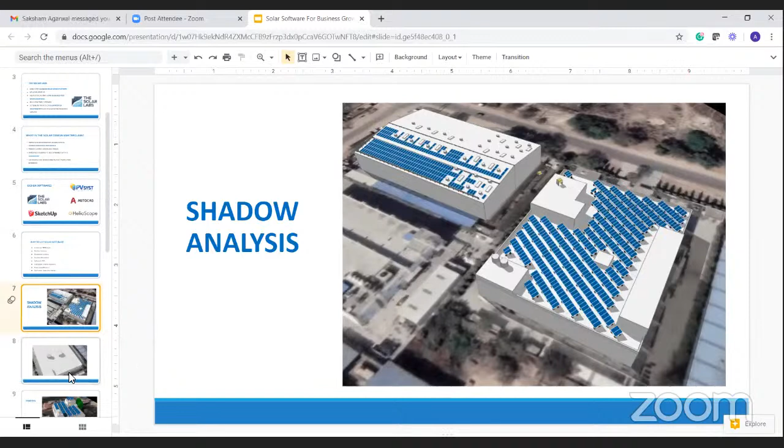To show you some of the features, this is the shadow analysis. I will be showing you all of these features in a live demonstration. The first one is the shadow analysis.

To give more emphasis on the shadow analysis, I want to point out that the cylindrical object's shadow analysis is way different than the shadow generated by a polygon. Here you can see two polygons of the same size, one cylindrical, one square, and you can see what the shadow pattern looks like.

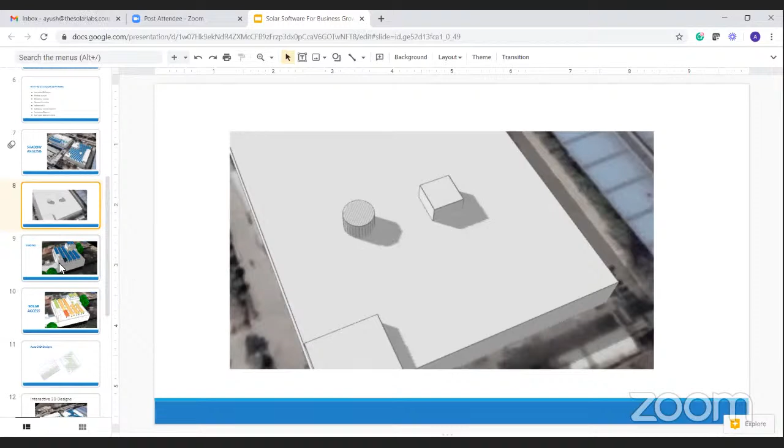This is the shading that we are getting due to these high-rise buildings. All these plans are being generated by me myself, and I am showing you some of the designs that I feel have helped our customers a lot.

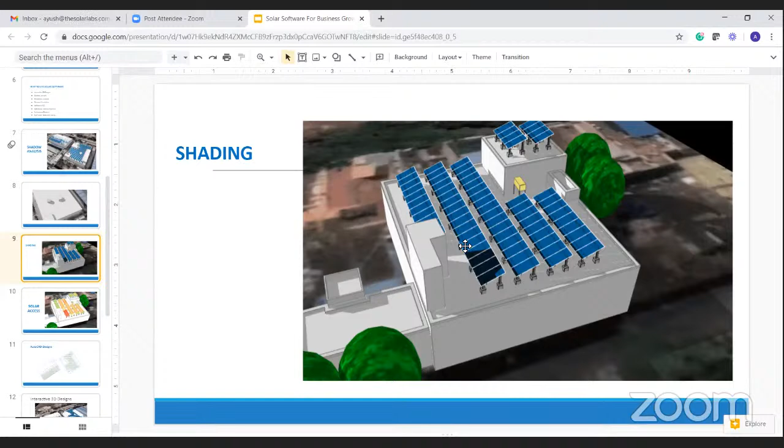For the same thing, we have the solar access map. I will tell you all about these things once we go into the software itself. This is the CAD layout generated by me, 3D designs, and all other things.

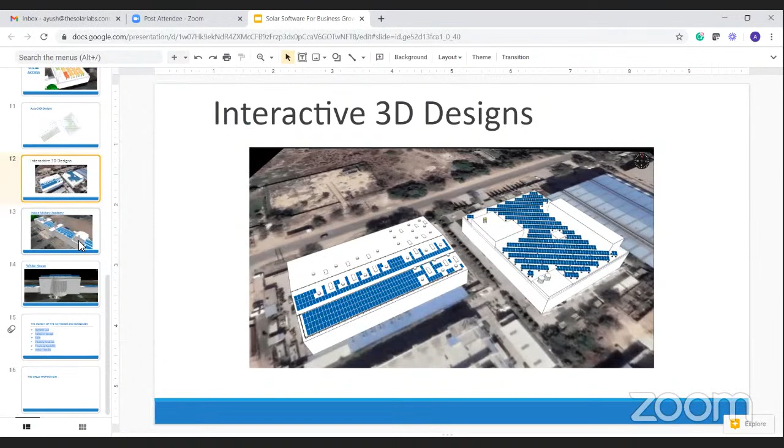So let me take you to the software now. To go to the software, simply go onto Google. Here you can type thesolarlabs.com and hit enter, and boom, we are on the page.

We are on the home page of the Solar Labs. It is a cloud-based software. You don't need to install this software, it doesn't take a bit of your hard disk. It runs only with a decent configured laptop or PC and a good internet connection, and you are all ready to go.

You just have to type your login credentials, like you would in Facebook or Gmail, and then you are ready to design, to show your designs, to make new designs anywhere in the comfort of your home, your office, on site, or to your client at their home or location.

So here we have an interactive map. This is the projects page. On the left hand side we have an interactive map showing all the sites designed by me and my colleagues all over India and around the world. You can reach any location by clicking on the site and going to edit, or by searching on the dashboard.

If you know the project name or the client name, you can search here, or you can go directly to the dashboard and choose any of your existing projects that you have already created.

To create a new project, click on this blue icon, and you will be asked to give the latitude or longitude of the site. In our software, unlike others, you don't need to give only the latitude and longitude — you can also search a site by typing the building's name if it's popular.

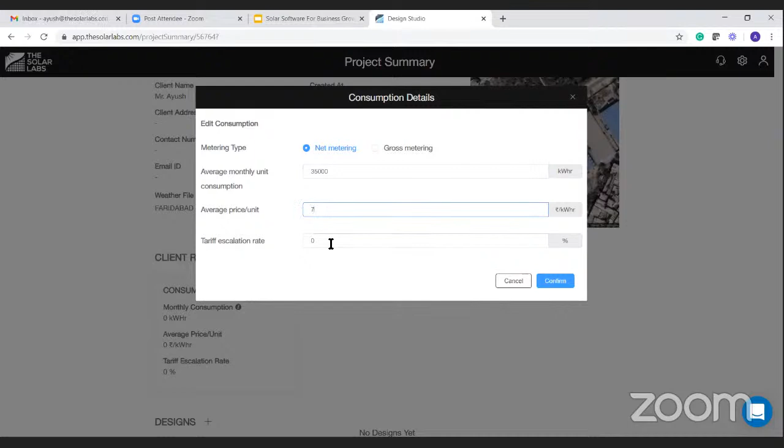For example, if I hit 35,000 units per month as my consumption, with an average of 7 rupees per unit as my average cost, and give a tariff escalation rate of 4%.

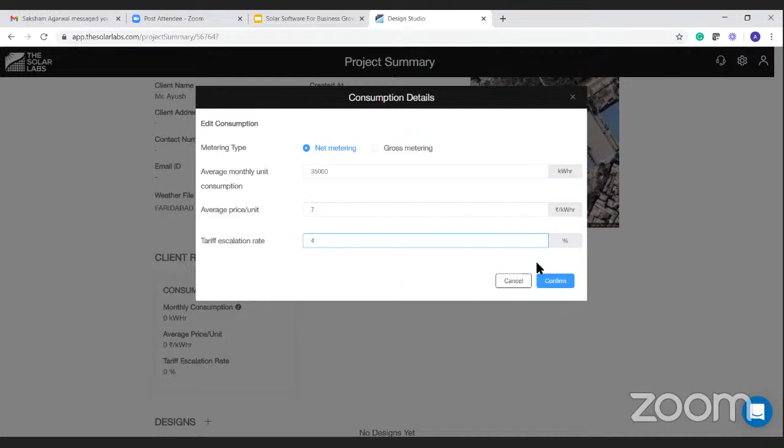Now many of you might know these terms. The tariff escalation rate means that the life of a solar plant usually ranges from 20 to 25 years, and in that time the solar discoms will not keep charging us 7 rupees. There will be some inflation, some profiting, and that's why they increase the price every year. So as of now, I have taken that after every year they will increase the price by 4% on average. If I hit confirm, all this data will help me do the financial analysis and calculate the payback period.

Here you can see there's a design plus option. After designing, if I click on this plus, it helps me as a designer, as an engineer, give options to my end customer.

Sometimes end customers want different things - they want to install different types of solar plants from different companies. For example, if I want to install a Tata Power solar panel of 400 watt, the length will be different, the finances will be different, the generation will be different.

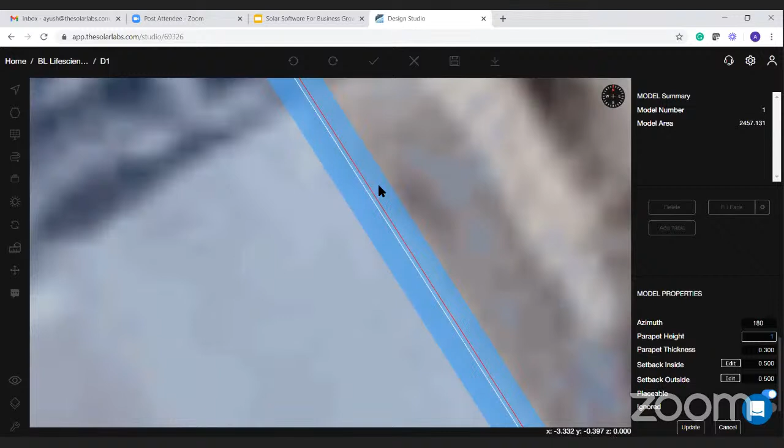If I zoom in a little on the design, you'll see that before and after this white line there is some blue region. This is the setback inside and the setback outside. Generally it's a practice that when an EPC player installs solar panels, we leave some space around the edges for safety and for easy access of the whole roof. So we provide this region to visualize that when we place panels, no panel will be placed in this dark blue region.

No panel will be placed in this dark blue region, and I can change the setback inside and setback outside as well. As I've told you before, this software doesn't control you, you control the software, so everything is editable according to your wish. If I want to keep a setback inside of 0.2 meter and a setback outside of 0.1 meter, now you'll see that the blue region has shrunk, and in this region no panels will be placed. So I can better keep this setback inside at 0.4 to make it more realistic.

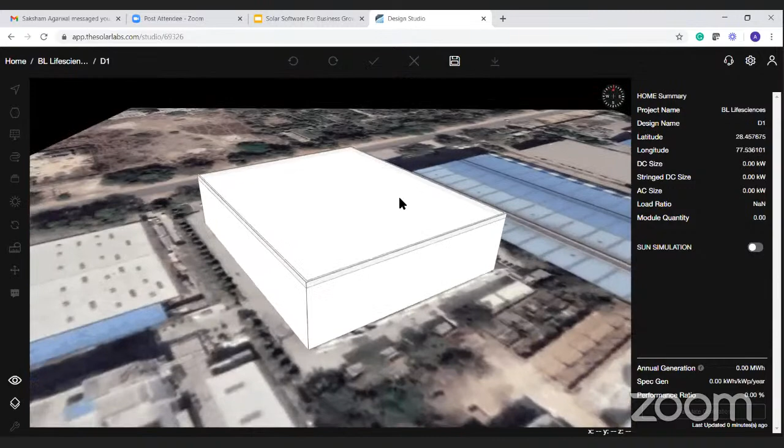Now you can see we have got a parapet also, and there are some mumties and cabins on the roof. I can draw these mumties and cabins too, but first I want to show you how the building will look in 3D. So this is a rough building, how it will look in 3D. You can see there are no objects yet—we draw in 2D, and our software, using AI tools, has converted it into a 3D building. That's how easy it is to draw on our software.

Now if I have to draw the mumties and cabins, I can just go and choose the polygon tool, or simply press the alphabetical P key as a shortcut. I go around the edges again, or if I know the dimensions, I can hit the dimensions instead. So here I'm going around the edges, and I've completed this design. I can similarly do it for the other three mumties and cabins.

I can change the height individually also. So if I want to change the height from 2 to 2.5 meters, I can do it. Let me keep it as 1 meter only, as this is the outdoor unit of the HVAC, the outdoor unit of the AC. Similarly, I can draw it like this.

And here you can see there are some cylindrical objects also. These cylindrical objects are cylindrical water tanks, which are very common in our residential buildings. So what I can do is simply go to the model on the left hand side, and choose the cylindrical option. Wherever I wish to draw a cylinder, I go to the center, hit my mouse key, and give it any radius by scrolling my mouse, or I can hit the tab key on my keyboard. Suppose I want a radius of 0.7 meters, so I give 0.7 meter radius and a height of 2 meters, and here we are done.

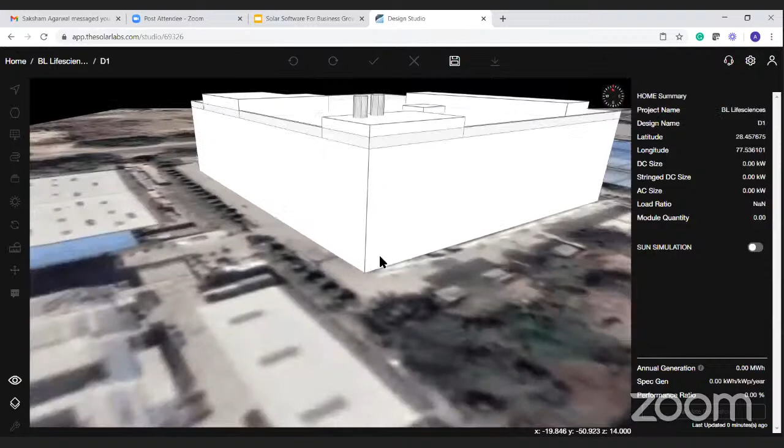Now this is how your roof will be looking like in 3D, with different objects - cabins, mumties, HVAC - all of these things done within a span of 10 minutes or 5 minutes. That's how easy it is to draw on our platform.

Now you must all be wondering whether we should provide the data or the parameters only in meters. That will not be the case. If I go to the left hand side, bottom left into the design settings, I have an option to use my dimensions in feet and inches or in meters, and I can hit save and that will do it.

Now I want to show you some features that are the USP of this software. If I click on the save button, on the bottom left hand side you can see a sun shape icon. If I click show on this icon, this is a color coded map that we have generated by taking into account the sun hours of 365 days. We have taken an average of all the sun hours throughout the year and generated this color coded map.

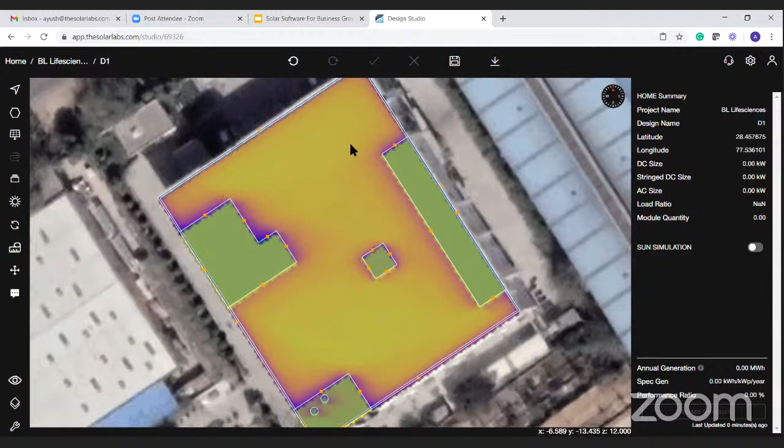This color coded map tells you the impact of shadow from different objects on the roof. Here you can see that because of these objects and the parapet walls, we are getting some shadow. This bright yellow color shows that the roof will be getting a decent amount of irradiance with a little shadow. Here, if I place the panels as an engineer, as a designer, I will be getting maximum generation.

As we go near the objects, we are getting into a somewhat light reddish region. This shows that because of these objects and the height we have provided, there's some impact of shadow on the bottom roof. Because of this shadow impact, if we have less space, we can still place panels in this light reddish region. But as we go nearer to the objects, into the more violetish and bluish region, the impact of shadow is greater.

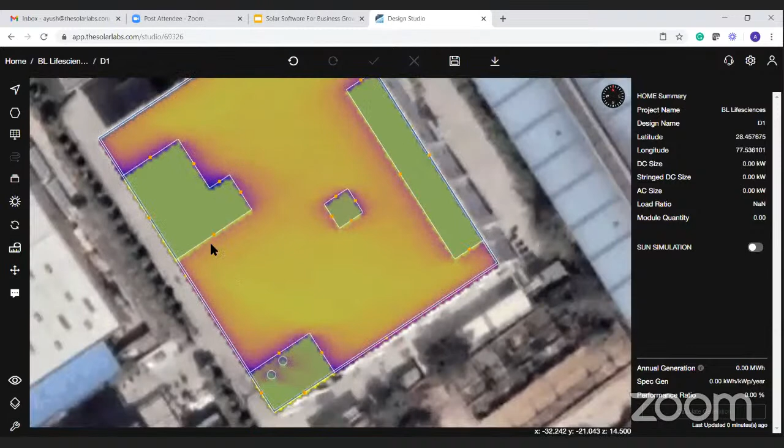The irradiance is not of that much amount, and hence placing panels over here will not be economical or wise. Placing panels over here could create hotspot regions on the panels, which can lead to higher degradation of the panels. It can increase maintenance cost, operation cost, as well as reduce the overall generation of the plant you have calculated.

Now I will tell you two or three ways to place panels on this software. To place the panels, you can choose the roof where you want to place them, and on the right hand side you can choose the fill face option. By choosing the fill face option, the software, using AI technology, will place the maximum number of panels, and here you can see an optimum row spacing has been taken into consideration. To calculate the row spacing, the software takes into account the geolocation, the tilt, the length of the solar panel, and the climatic conditions. I will describe each of these in a minute.

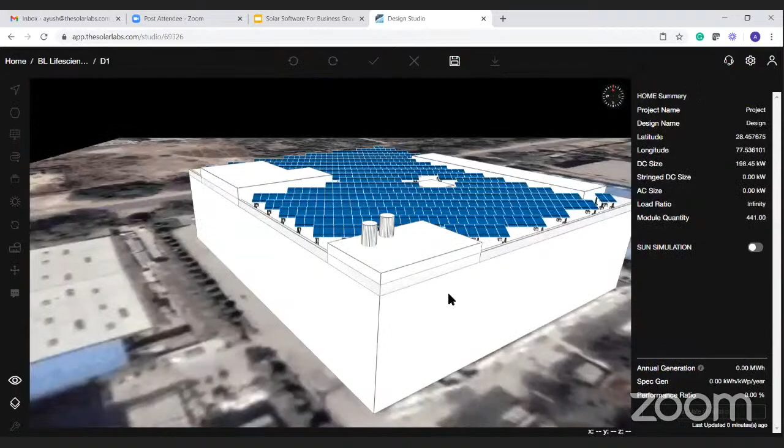So I'll just hit update, and by showing you all of this, now if I show you this in 3D—this is how your roof will be looking, this is the structure, and this is how your roof will look.

Now if I show you another color coded map, which is a USP of this software only—on the left hand side below the heat map, we have the solar access map. If I go onto the show key, this map is also calculated on the same methodology where all the sun hours all around the year are taken into consideration. But instead of showing the impact of shadow on the roof, this map tells you the impact of shadow and irradiance on individual solar panels.

So here you can see different types of panels, different colors. The dark green color, if you go to the right hand side, you can see that when I'm choosing this panel, the right hand side shows us average solar access of 99%. This means that 99% of the time this individual solar panel will have no impact of shadow, and only 1% of the time throughout the year it will have some impact of shadow.

If I go into the lighter green, the solar access is reduced to 97.8. If I go yet lighter, 96.1, 91.3, 87.2. So this is how the figures are coming as of now.

Now let me increase the mount height. As of now, the mount height is 1 meter. Let me change it to 2.5 meters to make it a little bit more realistic. And if I hit update now, I go and save the design.

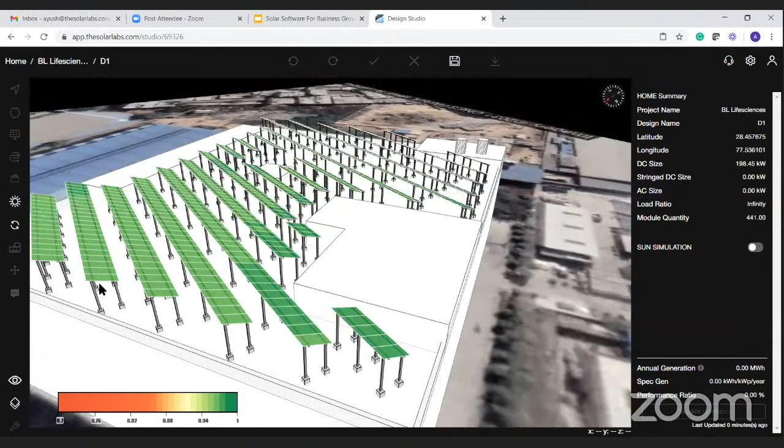Now why has it happened? It happened because if I show you in 3D, we increased the mount height, and because of that, the impact of these cabins that were causing shadows on the panels has been removed. Now there is no impact. We increased the mount height, and that's why the solar access has increased, and that has increased the generation with the same panels.

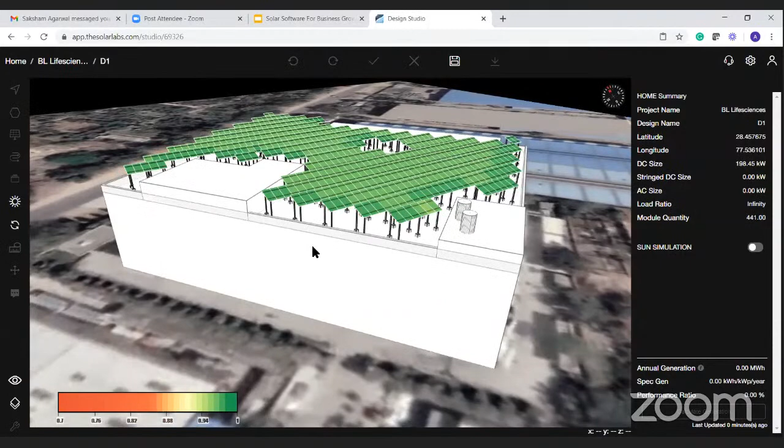Now some of you intelligent people will be wondering that there are so many legs here, there is no space for walking, and if I show this roof to a customer, they will probably say no. And I totally agree with you. So that's why what you are seeing right now is in a one-to-one table criteria.

Now if I go and choose the table as 2 into 2 to make it more realistic - I shouldn't say realistic because in reality we use 3, 4 and so on depending on the space and our installations - so if I choose a 2 into 2 now, my row spacing has increased, and now if I just go onto the solar access map and refresh it again.

Okay, so we are getting some red panels over here also. Let me see what's going on. So now if I go into auto, you can see that the row spacing has changed by double. I update it, save it, again make the solar access map, and refresh it.

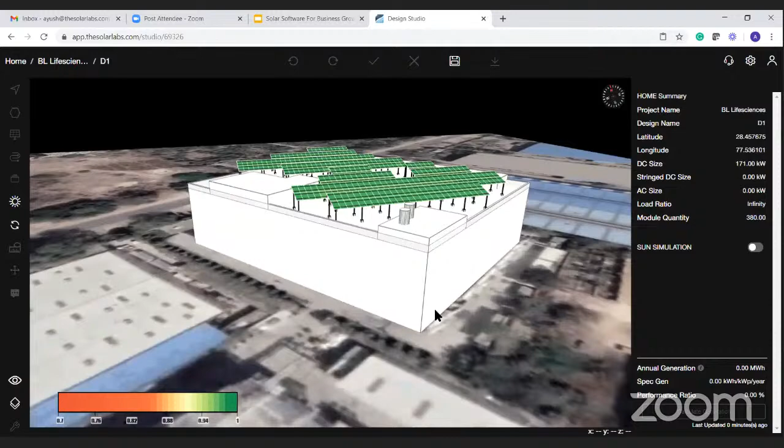Again everything is good. Now let us see the number of legs here - the number of legs have reduced, we have more space for walking, and this is in general how your building will be looking like. So this gives you a holistic approach of how your building will look.

And as you can see, if I'm increasing the row spacing or decreasing it, the software is pretty much a dynamic software. Nothing in this software is hard coded. As you change the parameters, you will see that the generation is increasing, the DC size is increasing, and so forth.

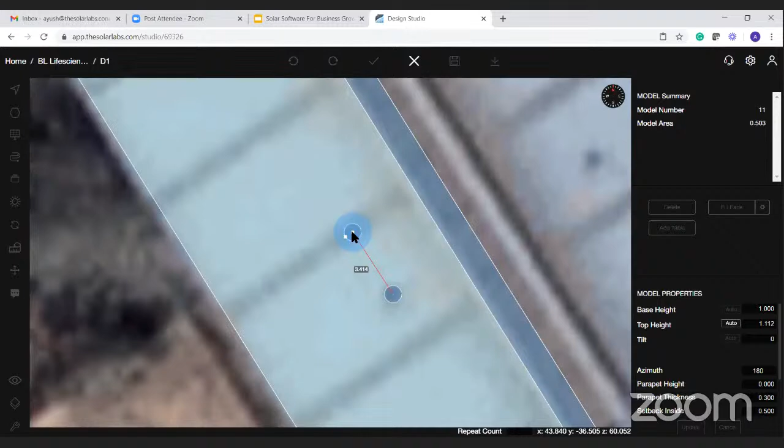We can choose the object, Control C, Control V, make a single copy, click on the alphabetical R key on a keyboard, and now the software will be asking me how many copies I want. So here you can see my software asking for the repeat count, and I want 1, 2, 3, 4 copies of it, so I can simply click 4. Now you can see 4 objects have been formed.

So let me put it back to its place, and now if I zoom it a little bit, here you will be seeing that there are 4 objects again, and I can place it wherever I want, according to my wish. If I want, I can drag one of them and I can move them individually also.

So let me move it a little bit to its left, and now it's fine. Similarly, let me move this also a little bit to its left. And now if I show you in 3D, the half of the shed roof will be looking like this.

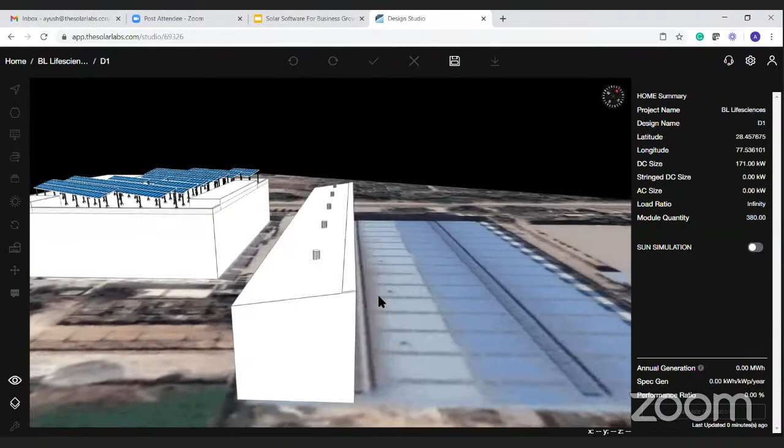Now, generally the shed roofs are symmetrical in shape, so I don't have to draw it again. I don't have to draw the whole structure again and do all of these things again.

What I can do is I can choose the roof, hit my Control C, Control V command, that will make a copy of the roof. And now if I hit the alphabetical M key on my keyboard, the software will be asking to choose an edge about which I want to mirror the object.

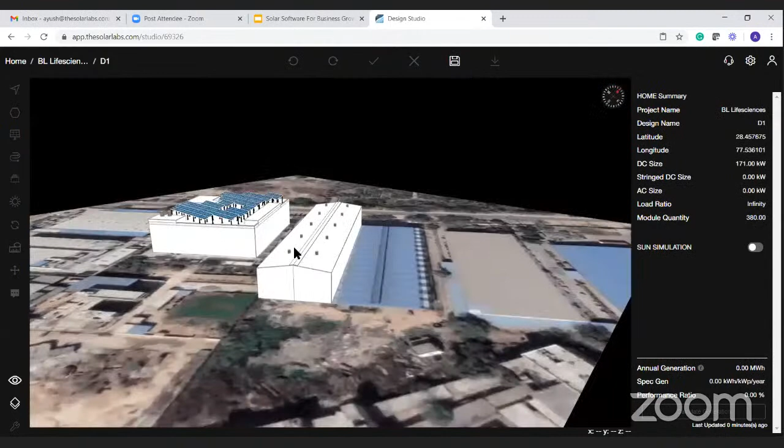So I can choose this edge, I can move it here, I can place it here, and to show you, this is how your roof will be looking like, the shed roof will be looking like, this is how your whole plant will be looking like.

And now to place the panels, I can choose fill face over here. That will place the maximum number of panels. I can choose the fill face over here also.

But let me show you another way of placing the panels. If I go and hit the undo key, and on the left hand side I go into the panel, and I go into this add subarray. Now many times it happens that a person doesn't want to cover his or her full roof, they only want to cover a particular section of the roof. So we can use this option to cover a particular section of the roof only.

So suppose I want to cover only this portion of the roof, I want to place the panel only in this portion. I can just go over here, I can make it, and now only in that portion the panels have been placed.

I can again choose the panel type, panel make. A particular row spacing has been chosen, and as of now the panels are oriented in due south direction. Now if I want, I can make them orient in any direction I want.

So if I want it to be parallel to the wall, I can go on to the azimuth, and here I can choose the southwest southeast direction and hit update. And now you will be seeing that the panels are placed parallel to the roof.

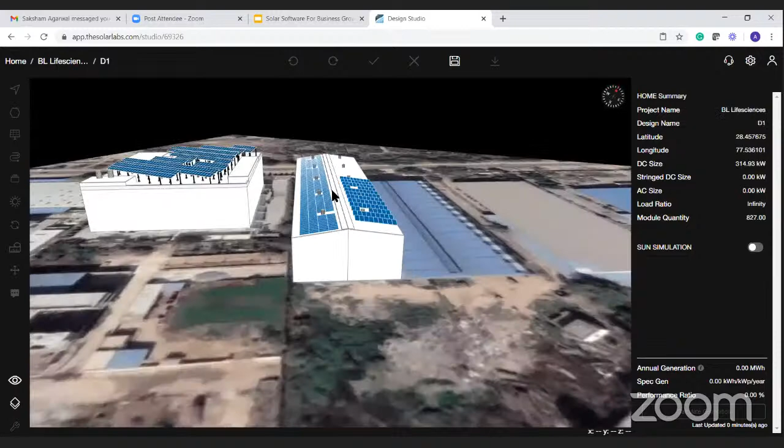So you can see they are placed parallel to the roof. And now if I generate the solar access map and see how my generation would be.

So here you can see the generation is coming like this. Average solar access is coming as good as 93.4, and in some solar panels as 94 also. So that's good. But is it at its best capability? The answer is no.

So if I go into the sub array, and now if I keep my azimuth as 180 degrees, then we get the maximum solar radiance. Now if I hit update, save the design, go onto the solar access and refresh my design, you will see that the solar access has improved a little bit.

So now the solar access is coming as 98.5, 98, 90.9. That's a lot better than what we were getting before. So the software helps you in that thing also.

Now let me show you one more thing. Suppose if I choose here this sub array, on my right hand side you can see that the size of only this roof, half of the roof, the DC power this is producing is coming as 108 kilowatt, and the number of panels used is 343. Now suppose the customer you're designing the plant for only wants a plant of 90 kilowatt.

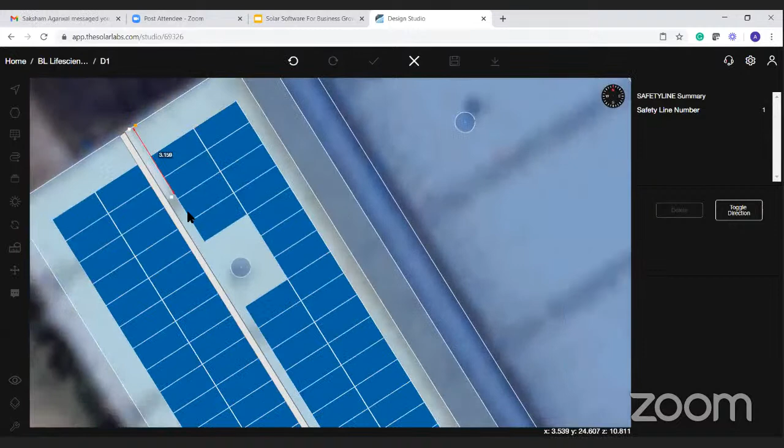Now I can place the safety lines also. These are generally provided for safety purposes of the worker who is going there for cleaning purposes or for operation and maintenance. So suppose I want my safety line till here only, and similarly I can place the handrail also.

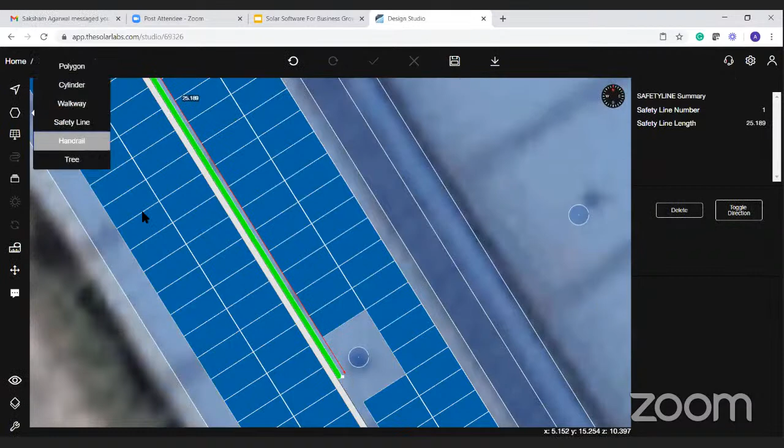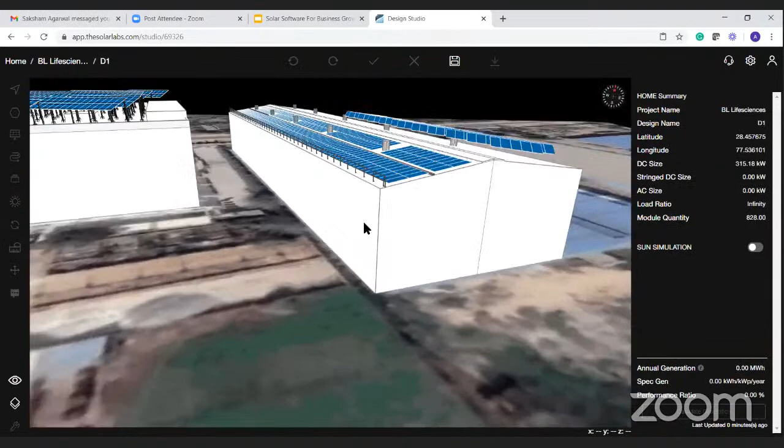So I can place the handrails. You can also place the handrails on the RCC roof. Generally what is happening nowadays is that instead of a whole opaque parapet wall, people like to install a small parapet wall of 0.1 or 0.2 meter height, and then give a railing and install the railings. So it is over here. This is how it's happening.

Now if I go to the right hand side and choose the sun simulation, so on today's date at this time, the roof will be looking like this. That is on 26th August at around 5:45 p.m., the roof is looking like this. But I can see how my plant is generating shadow all around the year at any time.

So if today I want to see for 2 p.m., and now if I play this button, then for every day you can see the days are increasing, and by this you can see for any particular time, for any particular day, how the generation is going to be there and how it will impact.

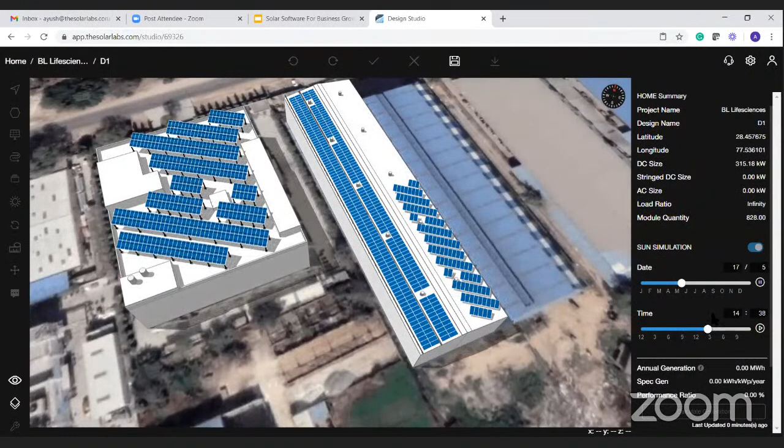Now I will let you settle it in your mind for the whole year. Let me give it back and play it. See how the shadow is increasing.

So this is how you are getting generation. Here you can see in the months of winter, the shadow length is increasing, and this is how we are getting the shadow all around the year at around 2:30 p.m. You can do this analysis for any day, for any time, for any particular month or particular season. You can do it like this.

So this ends all the generation part. Now here we can place the inverters also. If I go on to the left hand side and choose all the components in the inverter menu, on the bottom right hand side I choose add inverter.

So as they were having an inventory of solar panels, they are having an inventory of solar inverters. Here if I choose ABB, I see that the DC size is coming as 315 kilowatts, so I will be choosing my inverters in that sense only.

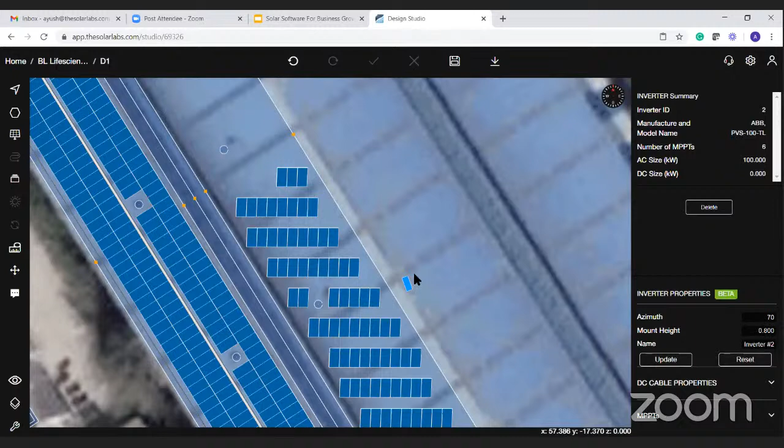Similarly, I can go over here and suppose I want to keep it at 70 degrees. I can also change the mount height. Suppose I want a mount height of 0.8 meter only, and if I hit update, I can go and do it like this.

And this is how your roof will be looking in 3D. So this is your inverter. Finally, your roof is looking like this. These are your handrails, these are your walkway, the safety line.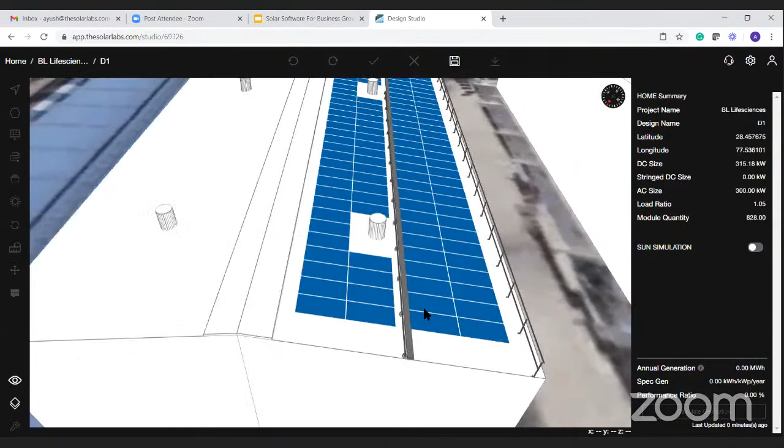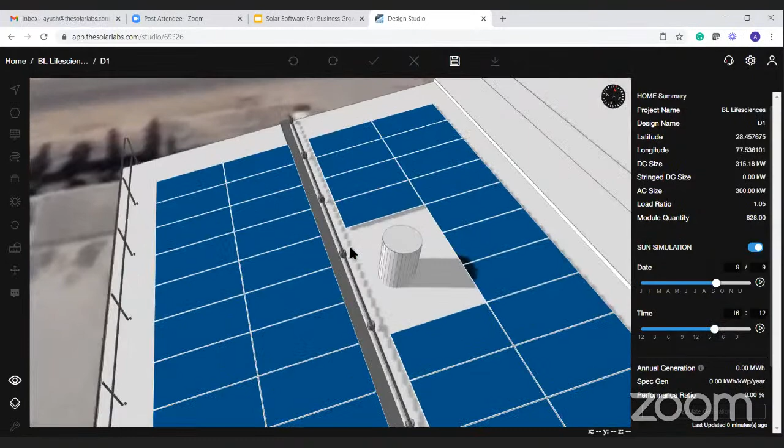And if I show you one good thing about the software, if I open the sun simulation and do this, here you can see that even the shadow generated by this safety line is taken into consideration and can be visualized here. So even the impact of the safety line on the generation will be calculated by the software. That's a good thing about the software.

This is all about the designing. So I would wait for some time for you people to ask some questions if you want on the designing section, and if there are no questions, then we will be moving towards the report section.

I'm not able to copy and paste. Okay, so that's a different scenario. Actually, I have a small video of yours, so I will be sending you that thing. Or you can simply go over here and go to the site settings and give permission to the clipboard. Here you can see that I have allowed my clipboard, I have given my permission to the clipboard. Similarly, you can go to the site settings and allow your site to copy and paste, and that will allow the clipboard option. This is a long question.

Okay, that's somewhat answering how pitch can be calculated to minimize the shading losses from other array and strings. Can you please explain me what do you mean by pitch, Mr. Lalit Rawat? I will be waiting for your reply if Lalit Rawat is here. Okay, so there are no more questions.

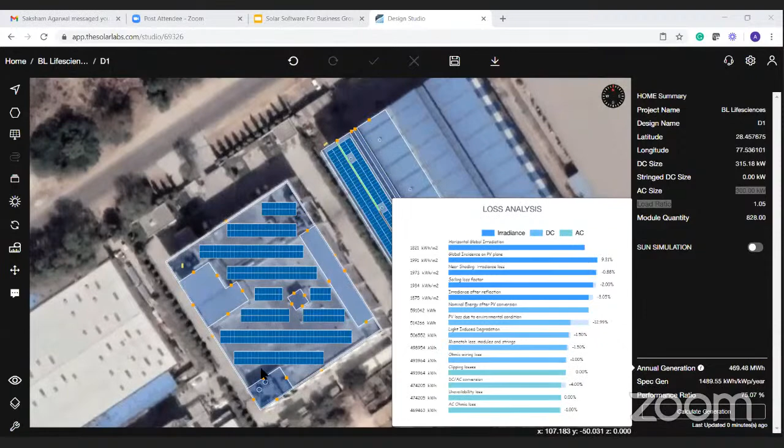So here, if I go to the bottom left hand side, onto the design settings, and if I go onto the losses section, I can see that we have mentioned all the losses being taken into account by the software. So we have soiling loss, mismatch loss, LID loss, DC ohmic loss, AC ohmic loss, availability loss, module degradation rate, and the inverter efficiency loss.

I think I have covered this topic of losses in one of my previous webinars, so you can go onto the Solar Labs YouTube channel and see it. And if we have not uploaded it, then we can have a next session on losses only, in which we can talk about the different losses and how they affect our production and how we can minimize them.

Is AC losses considered as default by the software, and what should be the performance ratio for a good system? That's a good question, Mr. Lalit. So AC losses is considered as default by the software, you are right in that.

So here, if I again go into the losses section, you can see that the AC ohmic losses and the inverter efficiency losses, a generic figure has been taken. Generally, when installing a normal plant, the AC ohmic losses come about 1% and the inverter efficiency losses come about 97-98%. That's why a generic figure has been taken. But as I've told you, the software doesn't bind you in everything. If you want, you can change the AC ohmic losses also, as happens in other softwares.

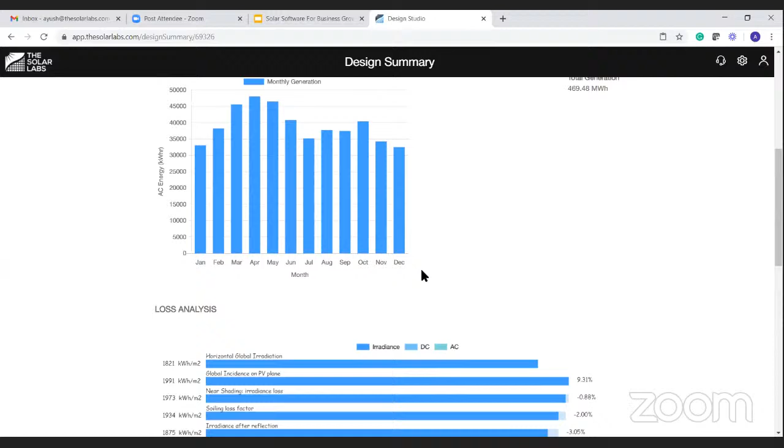These are the loss analysis that we have done. Now this is the bill of materials.

Here you can see the different modules that we have used, their quantity put over here, and their make, the company that we have used. Automatically the bill of material has been updated. The handrail length, the walkway length, the inverter quantity and make, as well as the safety line, all of these have been added into the bill of materials. All of this bill of material will be reflected into the report. That's a good thing about the software, that we don't have to manage the bill of material ourselves. Once we have designed, everything taken into account will be put into the bill of materials and reflected into the report.

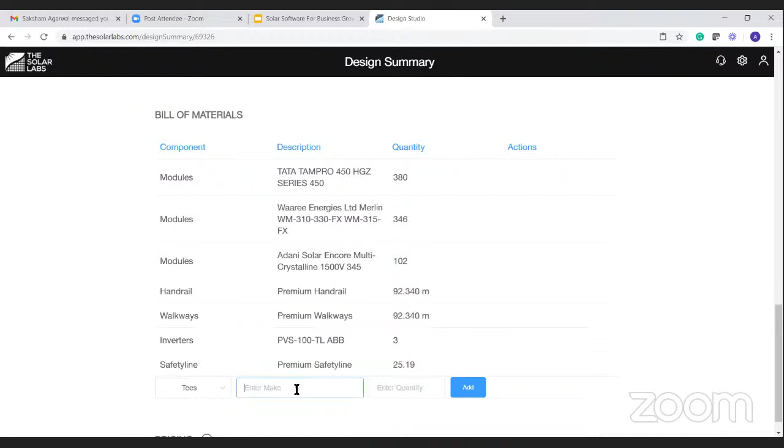Now if someone wants to add some other component also in the bill of materials, for example DC cable or tees, I give it a make of XYZ and a hypothetical quantity of say 7, and hit add. I will be pointing out in the report how it has been added, also in the bill of materials.

In the next, we have the design, we have the pricing option. This is the last thing we need to add. Generally in India, we the EPC installers charge our customers depending on a per kilowatt basis. Suppose if I choose a per kilowatt rate of 38,000 rupees, reduce the taxation to 0, the discount rate to 0, and update it.

Now you can see, depending on whether the state government or central government provides any subsidy, whether in percentage terms or absolute terms, you can edit it over here and put it in. That will also be taken into account for calculating the financial analysis. Now if I hit confirm, here you can see the payback period is coming as 3 years 11 months. The LCOE is coming as 1.22, IRR of 28.13, and so on.

Now if I download the report, here you can see that the software provides a report which is 16 to 17 pages. This is a lengthy report, so they have provided an option to untick pages you don't want to download. Suppose you don't want to download the about us page, you can simply untick it. But for now, to show you all the different features of the report, let me keep them all ticked and hit confirm.

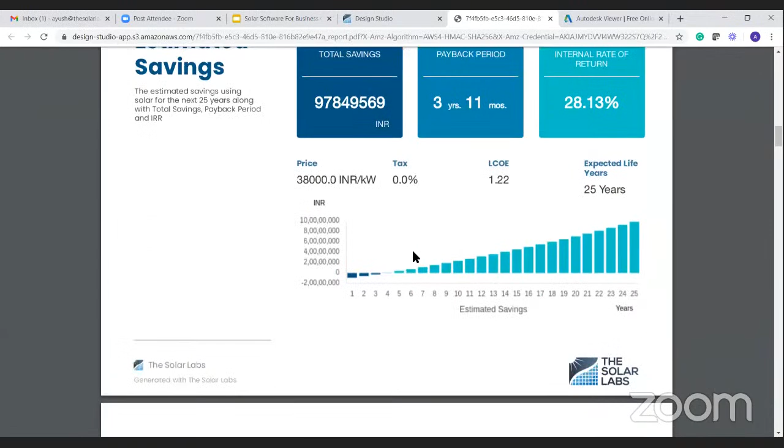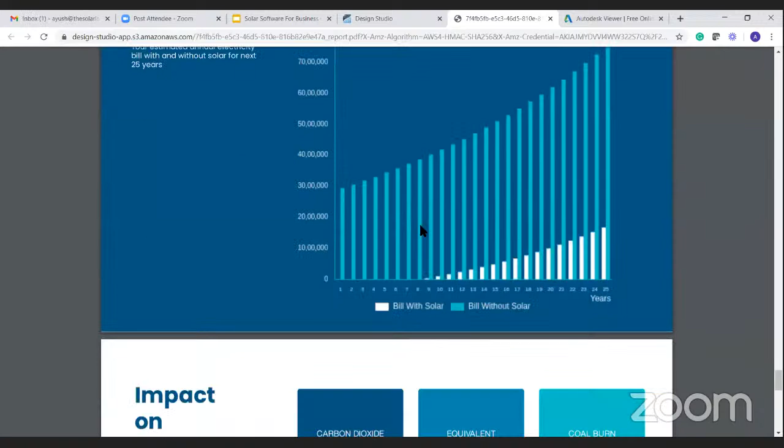Now you can go onto YouTube, this is a totally different session where you can see what the different features of the report are. Go and log into the Solar Labs YouTube page, and you can see the different features, how it can help you, how it can help your customer know the generation, how it can help an EPC player increase sales, and so forth. So I will not be discussing the report in detail now, but I will show you the different features.

This includes the impact on environment, a thank you slide, losses, a snapshot of the heat map and solar access map, and shadow analysis.

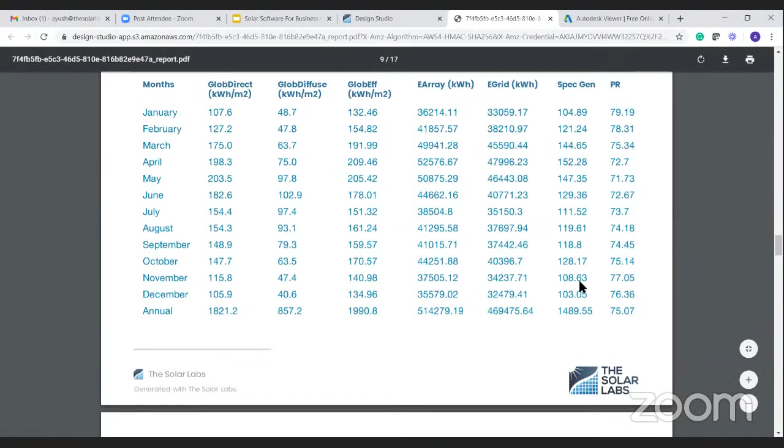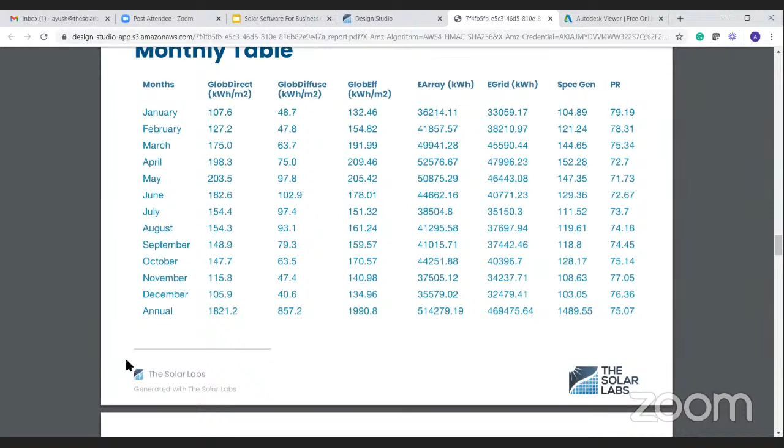This is the monthly table. This table is required if your end customer is going for sanctioning a loan. The banks will be asking for this particular slide of the presentation. In this presentation, the bank will see whether the customer will be able to repay their loan or not, by checking the global effective radiation coming on the roof, the E grid, the specific generation performance, and other issues. For knowing every parameter, please go onto the YouTube page and see the report video.

It's very detailed over there. I had made a promise that I will show you the T's, so I have added T's in my bill of materials, and that's reflected in my report also.

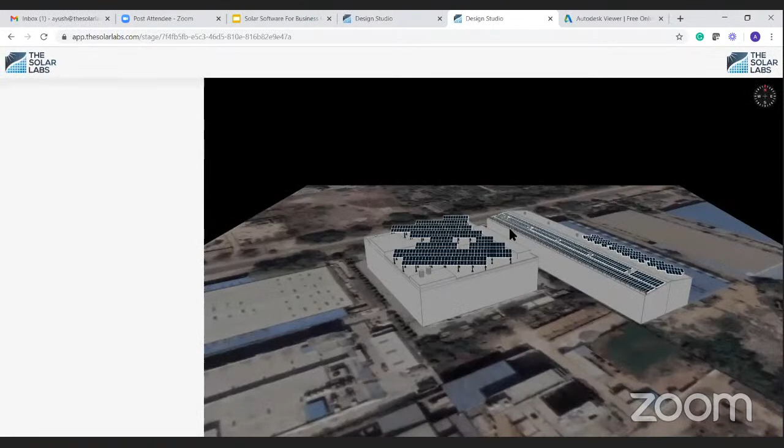So if I go onto the first page and click to view the 3D model, this will redirect me to the design that I have created. So if you are sending this PDF document, you download it and send it to any of your customers, your customer, by clicking on this link, can see how his or her roof is looking.

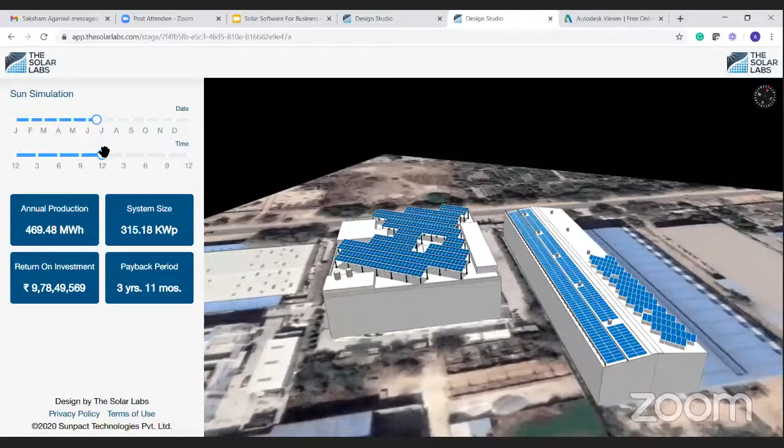They can do a dynamic sun simulation, that is shadow analysis, for any day, anytime, as well as see the important parameters also. You can share this link by itself with your customer.

So let me try, and if I share this link on the chat box, each one of you can go and see it on your own computer, how it's looking. You yourself can do the sun simulation and tell me your feedback on the chat box. So this is how it's looking.

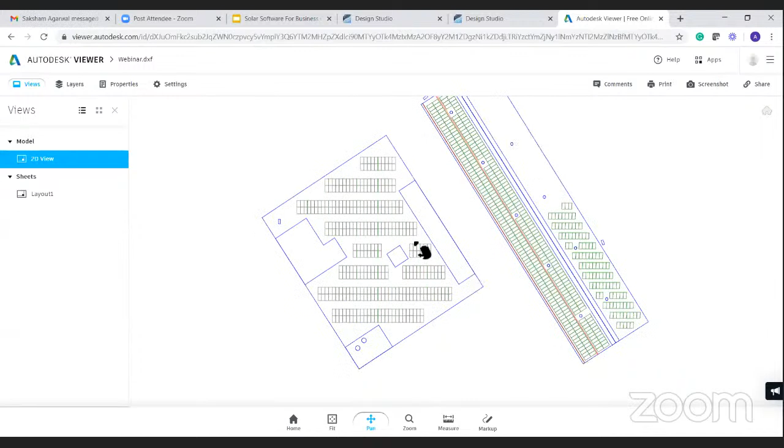Now if I go onto the AutoCAD file that we have generated, this is the CAD file that we just designed. We designed it in 2D, and the software uses AI technology to convert it into 3D and gives us an automatic CAD layout. This can be provided to the customer and can help the engineer know how the panels are oriented and where to place the safety line. These are color coded.

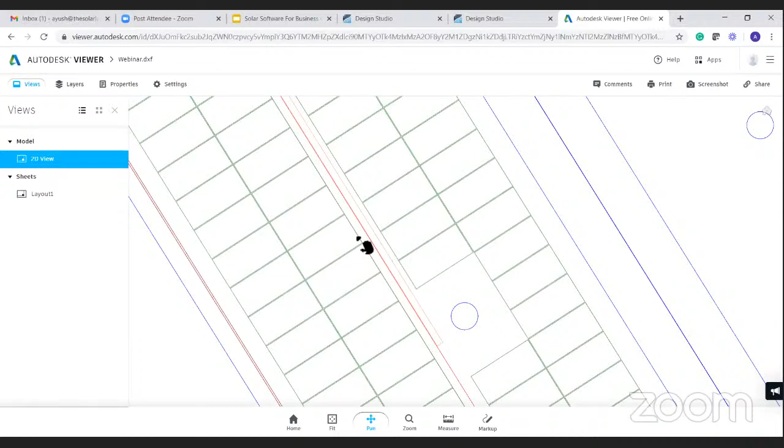The safety line is color coded in orange. The walkway is color coded in red. The handrails are color coded in brown. Panels are in green, and fixed structures are in dark blue.

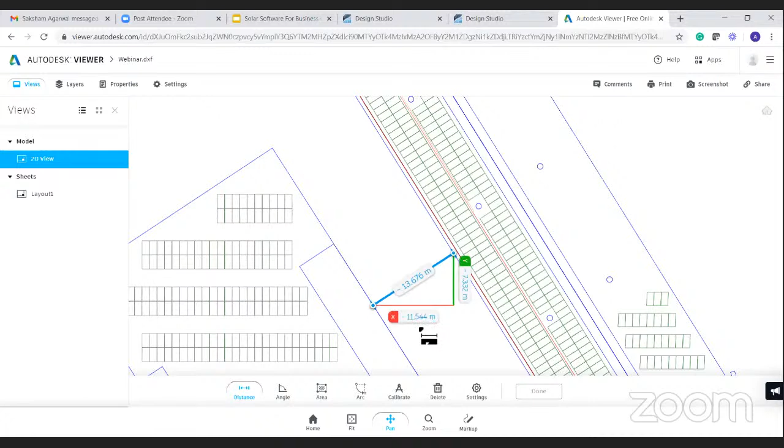Now a designer can go in, and if I move it a little bit, I can go into the measure tool and measure the distance between this and this building, I can do this also. All of these features will be provided by the software.

So this is in short how the software is, and what are the different parameters that you can change on the software. Today we have learned one of the solar software, the Solar Labs.